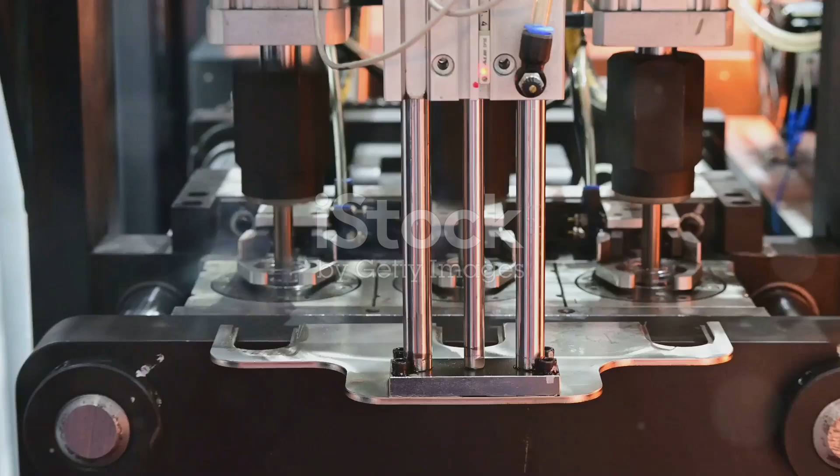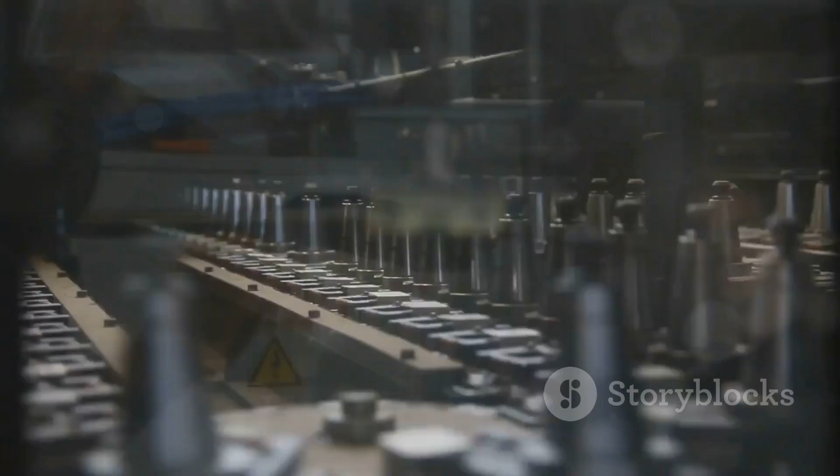Plastic die molds are the unsung heroes of manufacturing. These precision tools create a wide variety of plastic products we use daily. From medical devices to toys, they are the backbone of modern manufacturing.

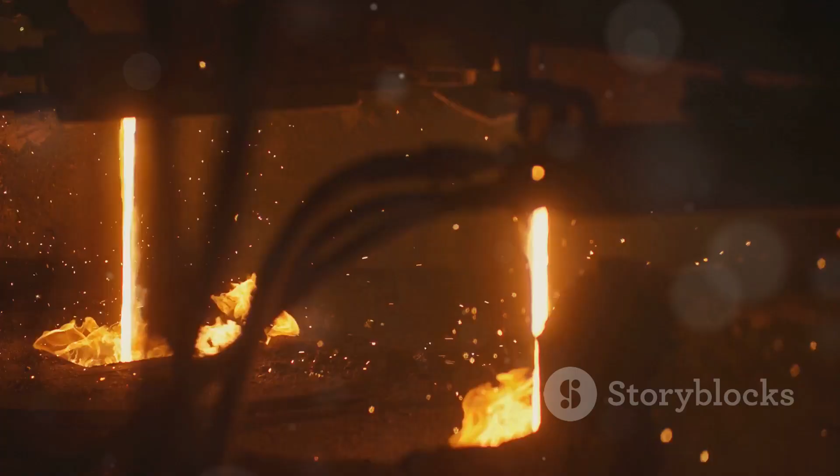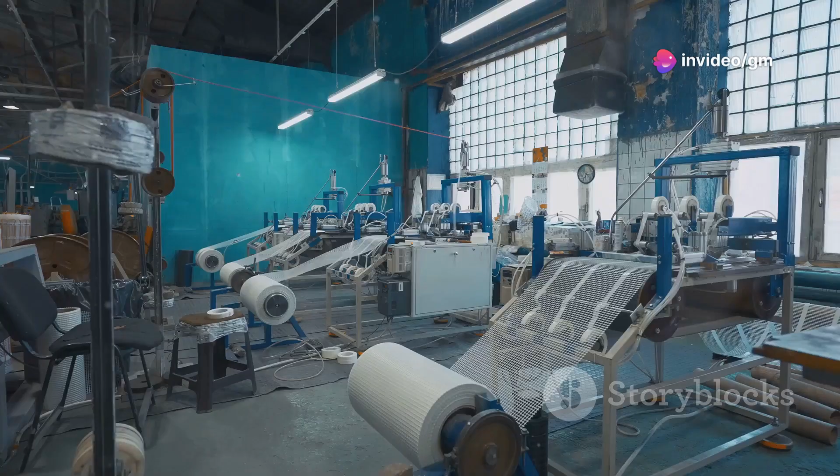Imagine a mold as a cookie cutter, but instead of dough, we use molten plastic. The process involves injecting molten plastic into a mold cavity, cooling, and ejecting the solidified part. This seemingly simple process requires a complex interplay of design, engineering, and precision machining. Without plastic die molds, our world would be very different.

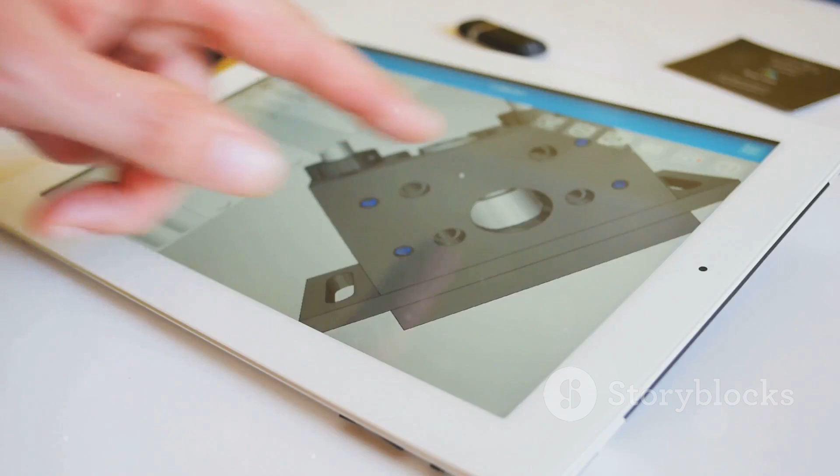The journey of creating a plastic part begins with a vision. This vision is translated into a detailed design using CAD software. Think of CAD software as a digital sculptor's toolkit, creating intricate three-dimensional models.

This digital model serves as the blueprint for the entire mold-making process. Every detail is meticulously defined, ensuring the final plastic part is flawless. Skilled engineers work tirelessly to perfect this digital blueprint.

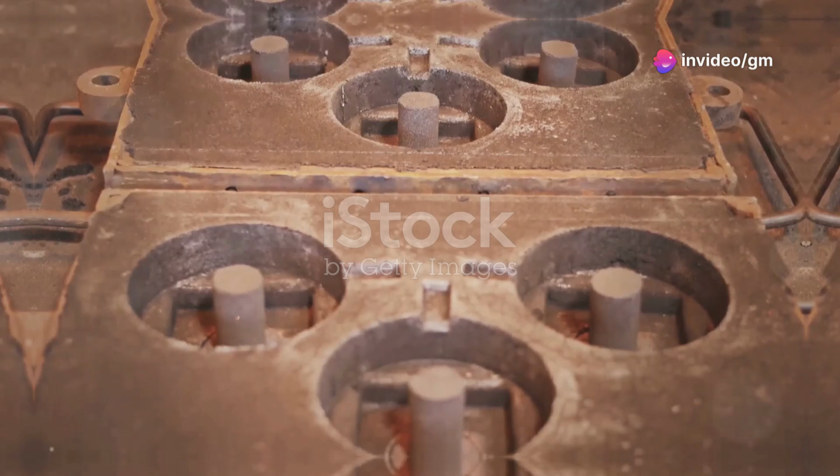The mold base is the foundation upon which the entire mold is built. It serves as the backbone, providing the necessary support and alignment for the mold components. Without a solid and well-chosen mold base, the integrity and precision of the final product can be compromised.

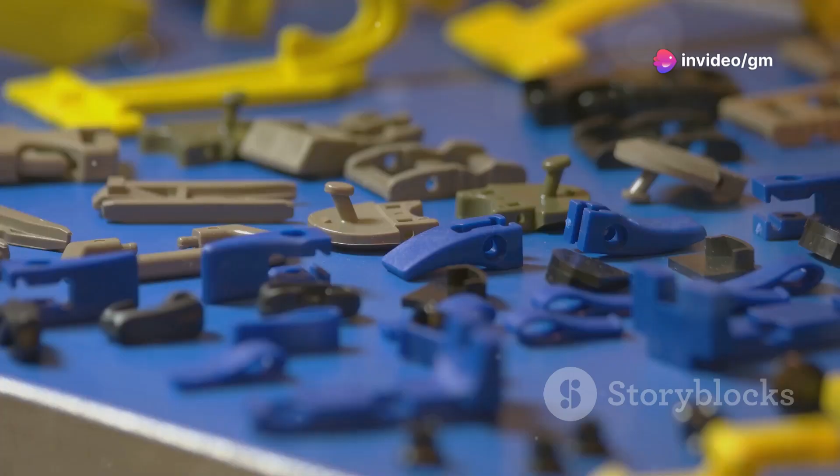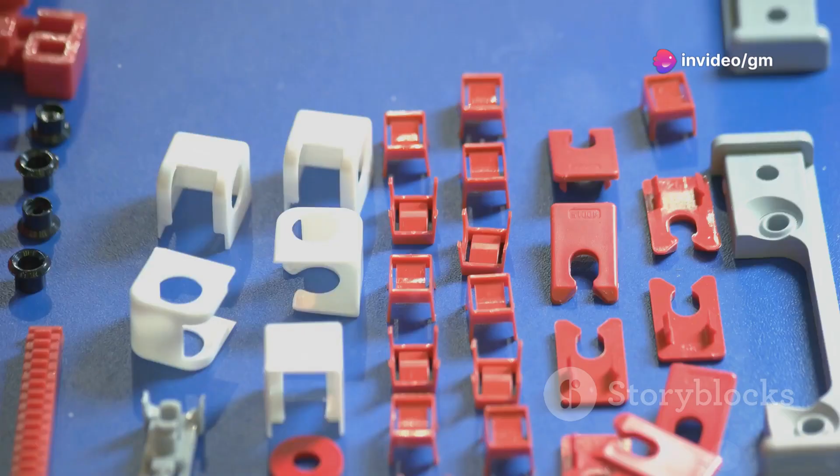The choice of material for the mold base depends on several critical factors. These include the type of plastic being molded, the complexity of the part design, and the expected production volume. For instance, if the plastic material is abrasive or the part design is intricate, a more durable mold base material might be required.

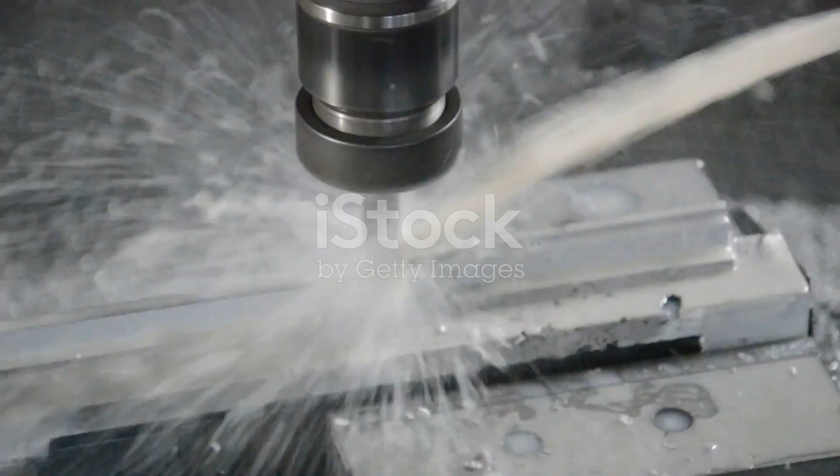Steel is a common choice for mold bases due to its exceptional strength and durability. It can withstand high pressures and temperatures, making it ideal for long production runs and complex molds. On the other hand, aluminum is favored for its lightweight properties and excellent thermal conductivity. This makes it suitable for prototypes and short production runs where quick heat dissipation is crucial.

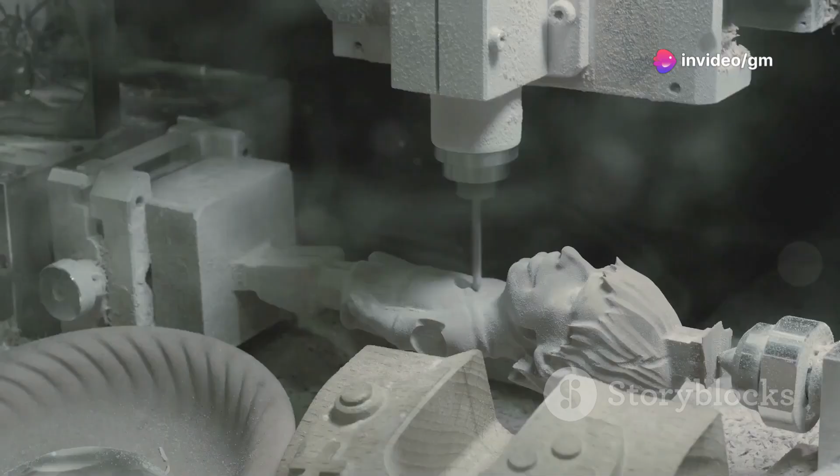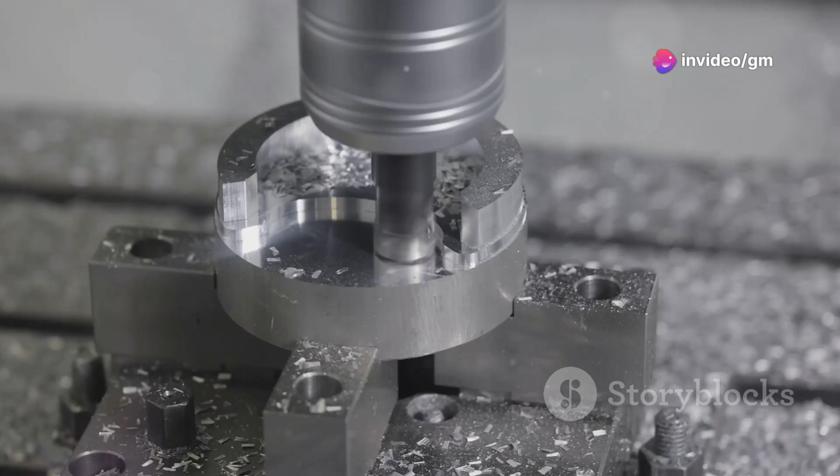The mold base is precisely machined to the exact dimensions specified in the digital design. This precision is crucial to ensure that all components fit together perfectly and function as intended. Creating a mold base involves using specialized cutting tools to carve out spaces for the cavity, core, and cooling channels. These features are essential for the molding process, as they help shape the final product and manage the heat generated during molding.

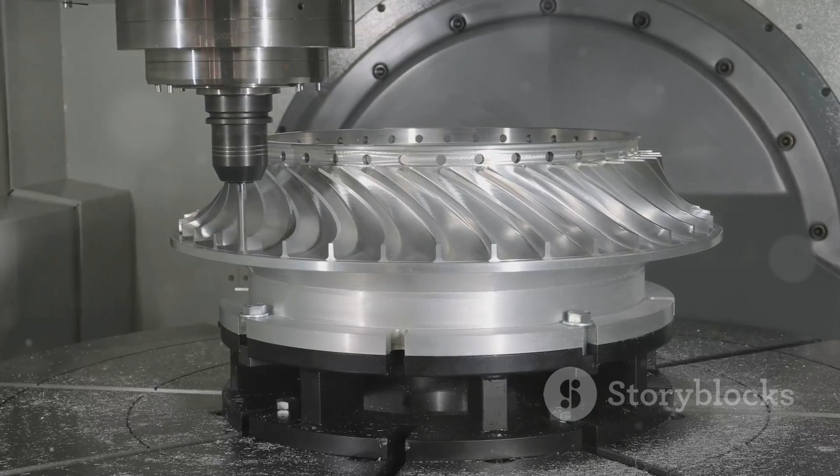Skilled machinists and advanced CNC machines play a vital role in this process. Their expertise and precision ensure that the mold base is crafted to perfection, providing a reliable foundation for the plastic die mold. This meticulous attention to detail is what ultimately leads to high-quality, consistent production outcomes.

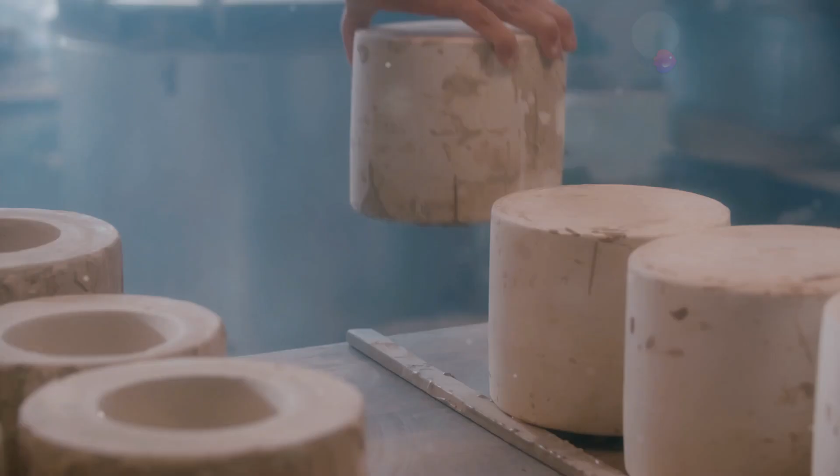With the mold base ready, the next step is to create the cavity and core. The cavity gives the plastic part its external shape, while the core forms the internal surfaces. Machining the cavity and core demands specialized tools and techniques.

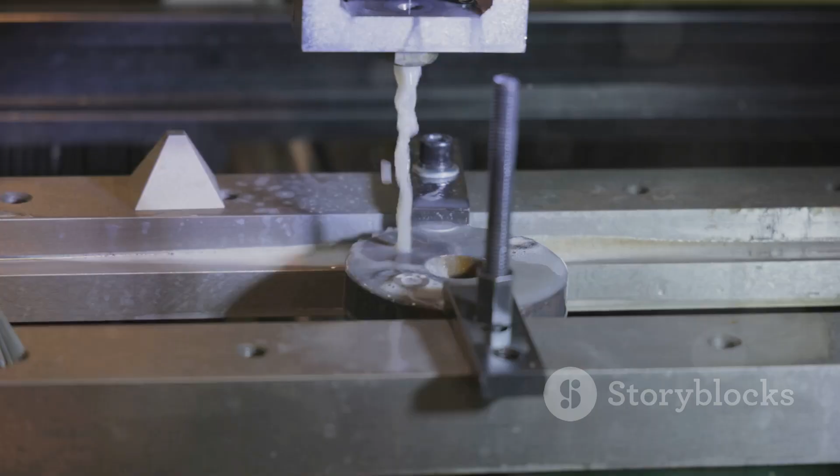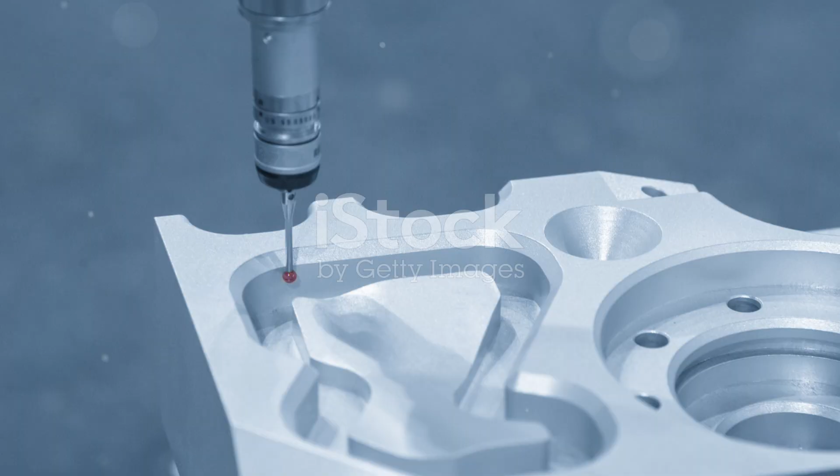For intricate designs, electrical discharge machining, EDM, is often used. EDM uses electrical sparks to erode material with extreme accuracy. This precision ensures the final plastic part has the desired shape, size, and surface finish.

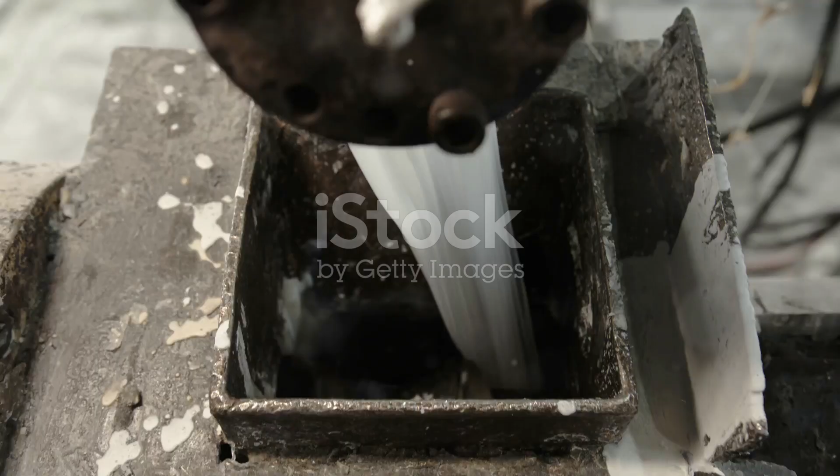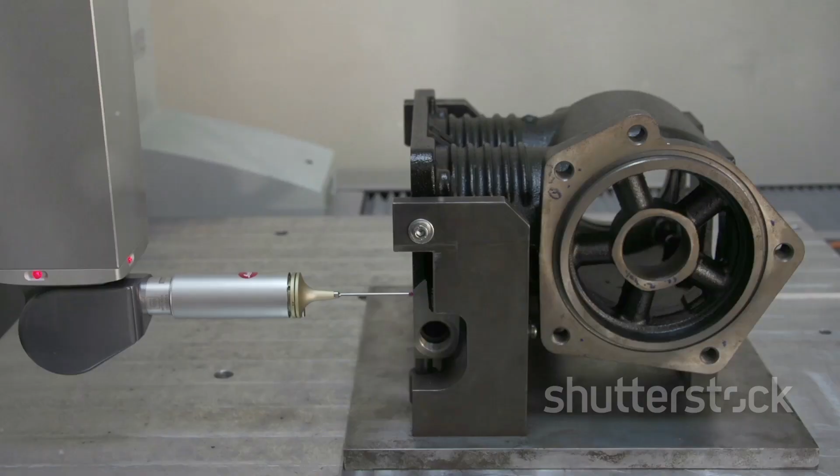Cooling plays a vital role in plastic injection molding. As molten plastic cools, it tends to shrink, which can lead to warpage or defects. Cooling channels circulate a fluid to regulate the mold's temperature. These channels ensure even cooling, preventing defects like sink marks or warping. Engineers carefully calculate the optimal layout and size of cooling channels. This ensures high-quality, dimensionally stable parts.

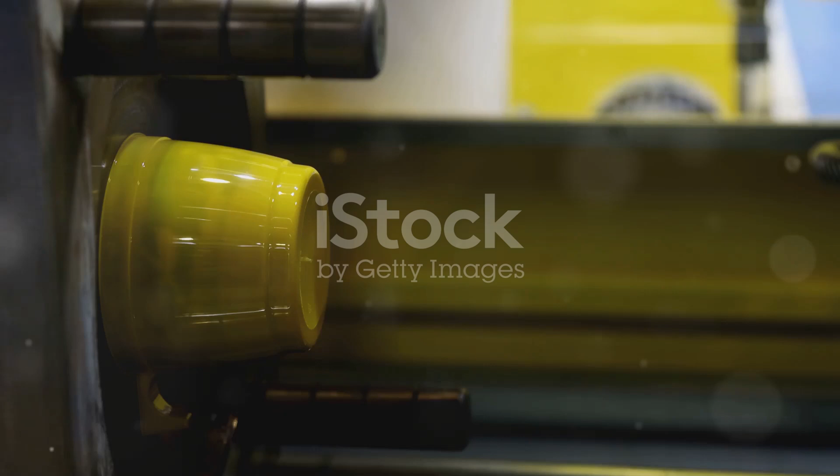Once the plastic has cooled, it's time to release the part from the mold. This is a crucial phase in the mold design process, as the integrity of the final product depends on how well this step is executed. The cooling process solidifies the plastic, making it ready for the next stage.

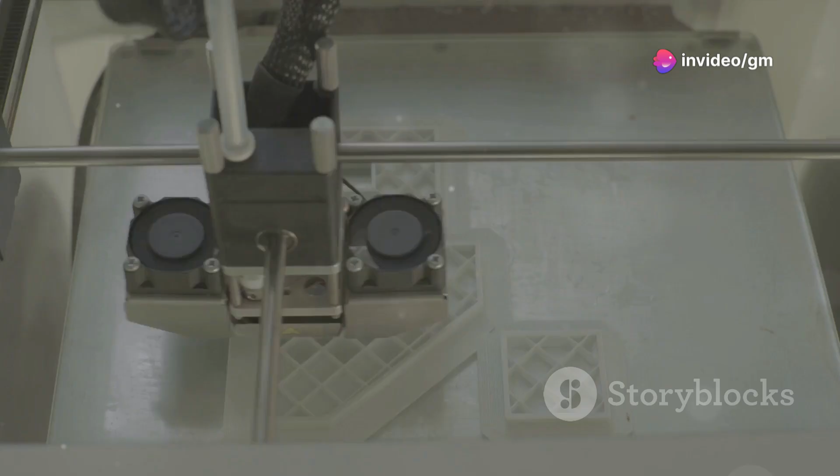The ejection system ensures the part is removed smoothly and without damage. This system is meticulously designed to handle the part delicately, preventing any potential defects that could arise from improper ejection. The efficiency of the ejection system is paramount to maintaining the quality of the molded part.

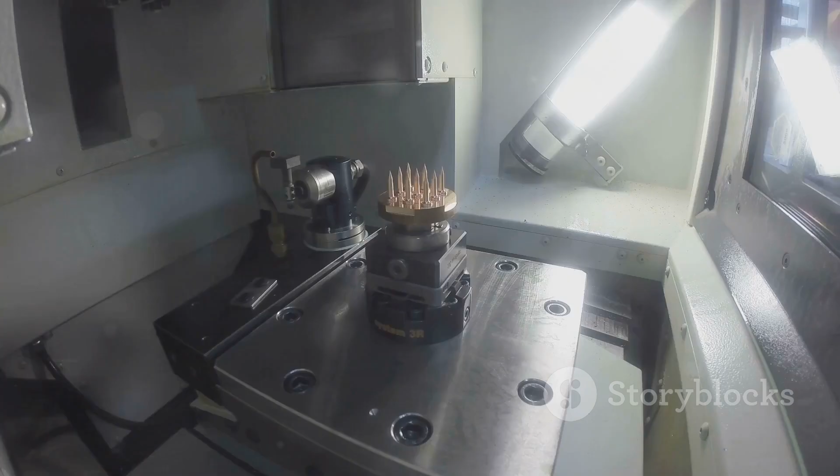Ejector pins, small cylindrical pins, gently push the part out of the mold. These pins are strategically placed to apply uniform pressure, ensuring the part is released without any warping or deformation. The precision of the ejector pins' movement is a testament to the detailed engineering involved in mold design.

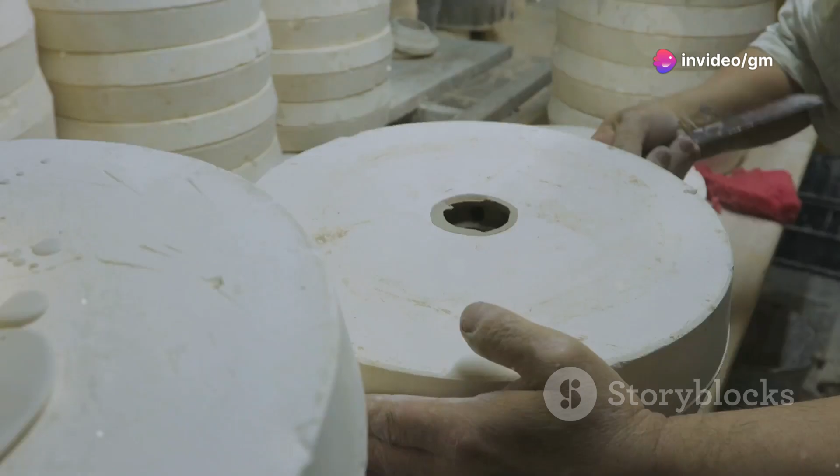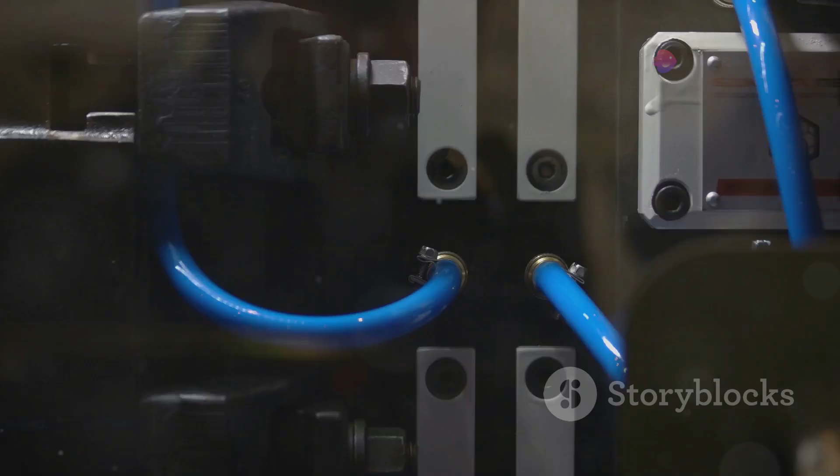For complex parts, stripper plates may be used to strip the part away from the mold. Stripper plates are particularly useful for parts with intricate designs or undercuts that make them difficult to eject using pins alone. They provide an additional layer of support, ensuring the part is released cleanly and efficiently. The design and placement of ejector pins and stripper plates are critical.

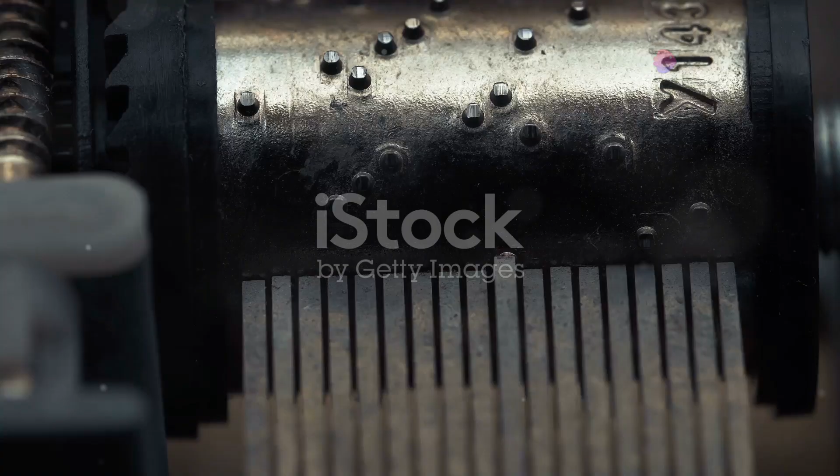Engineers must carefully consider the geometry of the part and the mold to determine the optimal locations for these components. Proper placement ensures that the ejection process is smooth and that the part maintains its intended shape and dimensions. They ensure the part is ejected evenly without applying excessive force.

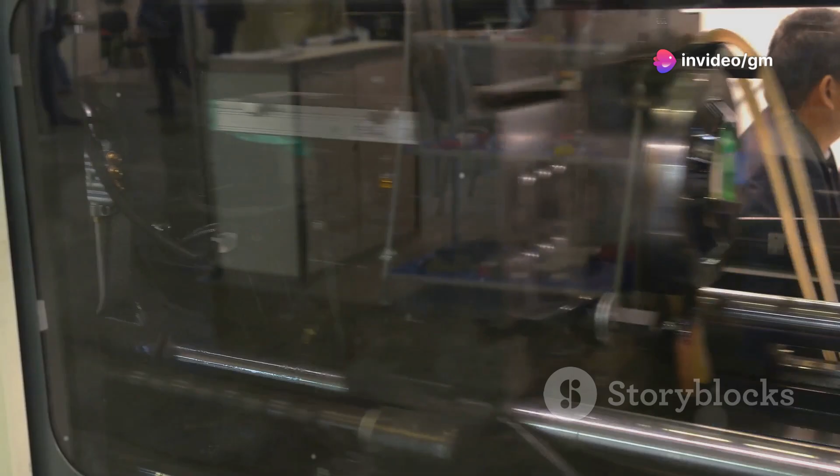Even distribution of force is essential to prevent stress concentrations that could lead to cracks or other defects. The goal is to achieve a seamless release that preserves the quality and functionality of the part. This careful planning ensures the efficient and damage-free release of each molded part.

Every aspect of the ejection system, from the type of pins used to the timing of their activation, is meticulously planned and tested. This attention to detail is what makes the difference between a high-quality product and one that fails to meet standards. The success of the mold design process hinges on these vital steps, ensuring that each part is produced to perfection.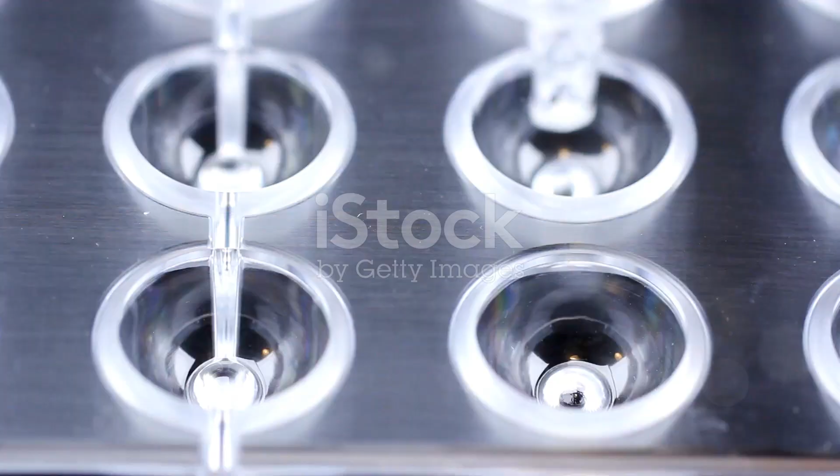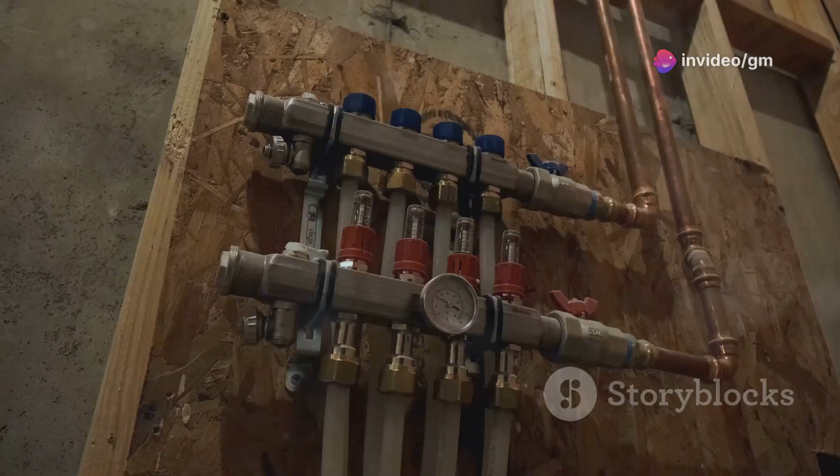With all components crafted, it's time to assemble the mold. The assembly process begins by fitting the cavity and core inserts into the mold base. These inserts are precisely aligned and secured, ensuring a sealed cavity for the molten plastic. Cooling channels are connected to the external plumbing system. The ejection system is integrated with ejector pins or stripper plates aligned and connected. Skilled technicians ensure every component is perfectly aligned and securely fastened.

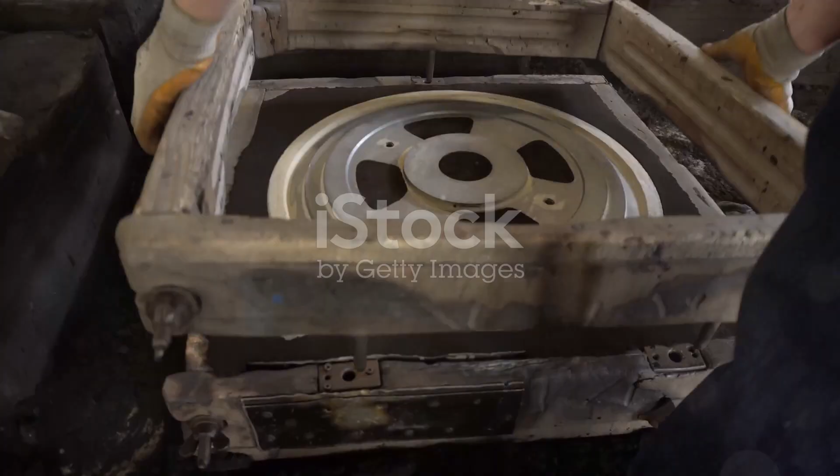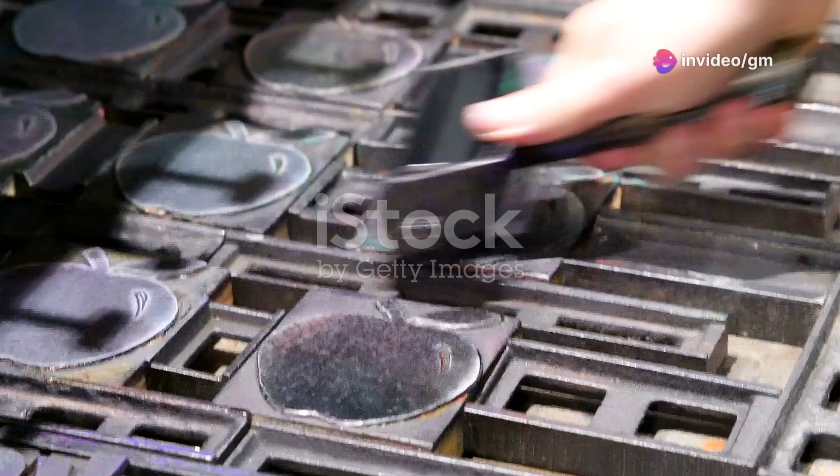The mold's surface finish plays a crucial role in the final part's appearance and functionality. A well-polished mold ensures that the plastic part produced is smooth, free of defects, and meets the desired specifications. The quality of the mold surface directly impacts the efficiency of the production process and the overall quality of the final product. A rough surface can result in blemishes or difficulty in ejecting the part.

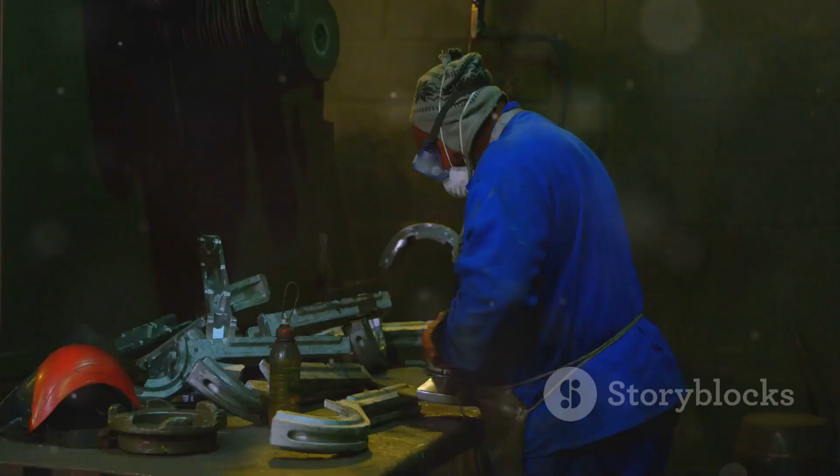These imperfections can lead to increased production time and higher rejection rates, ultimately affecting the cost and efficiency of manufacturing. Ensuring a smooth mold surface is essential to avoid these issues and to produce high-quality parts consistently. The mold undergoes a meticulous polishing process to achieve the desired surface quality.

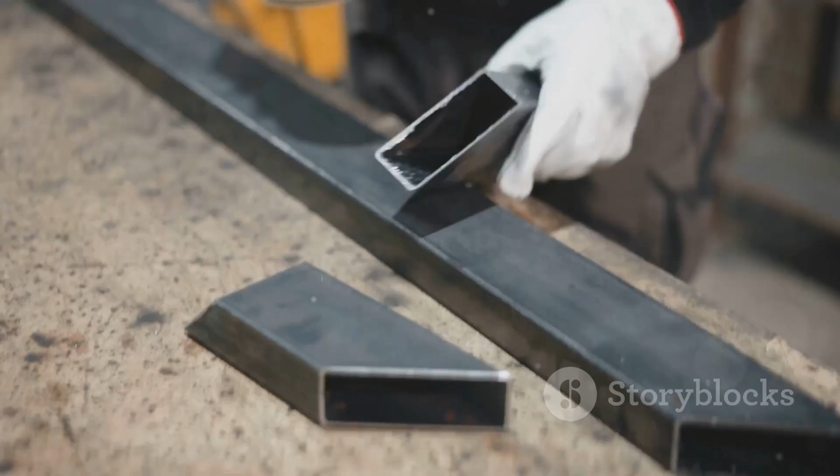This process involves several stages, each using different tools and techniques to gradually refine the surface. Skilled technicians carefully polish the mold, paying close attention to every detail to ensure a flawless finish. Polishing starts with coarser grits, progressing to finer grits for a mirror-like finish. This step-by-step approach ensures that any initial roughness is smoothed out and the surface becomes progressively finer.

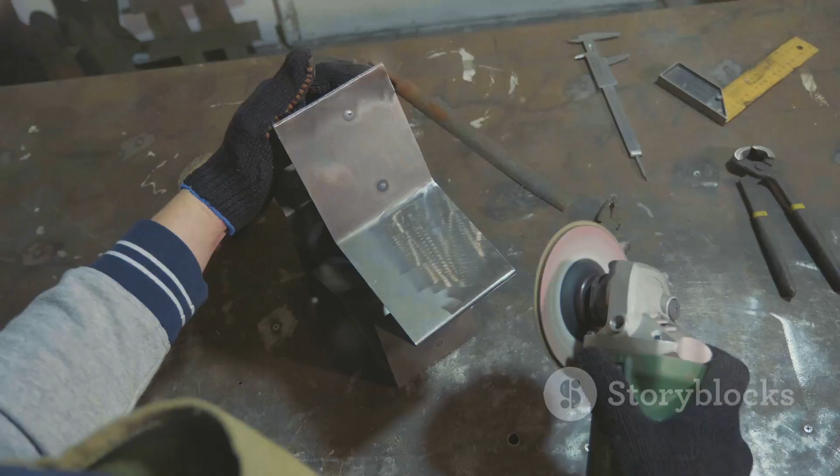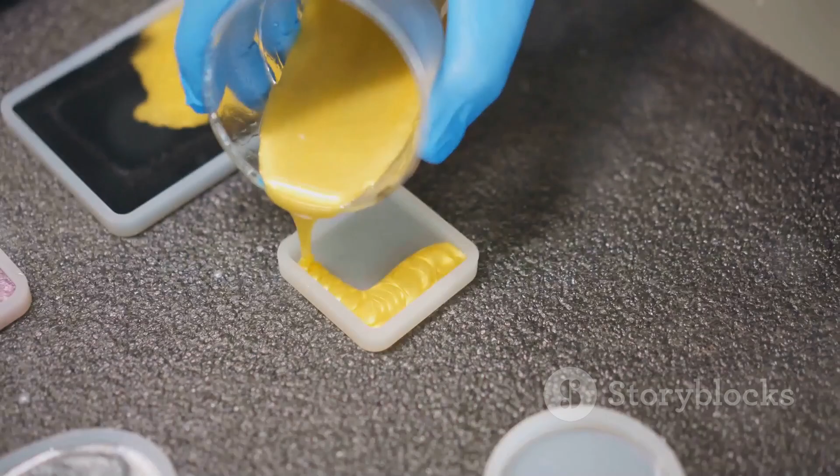The final stages of polishing use extremely fine abrasives to achieve a high-gloss, mirror-like finish that is essential for certain applications. Textures can be added to create specific patterns or finishes on the plastic part. These textures can range from simple matte finishes to complex patterns that enhance the aesthetic appeal or functionality of the part. The choice of texture depends on the intended use of the part and the desired visual effect.

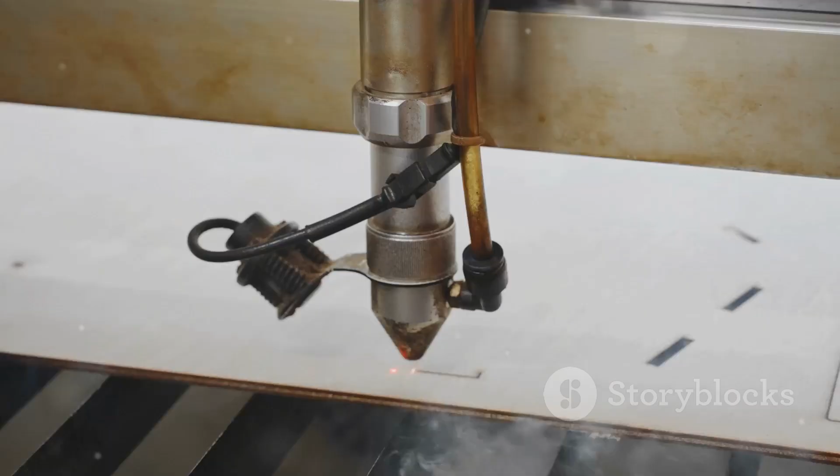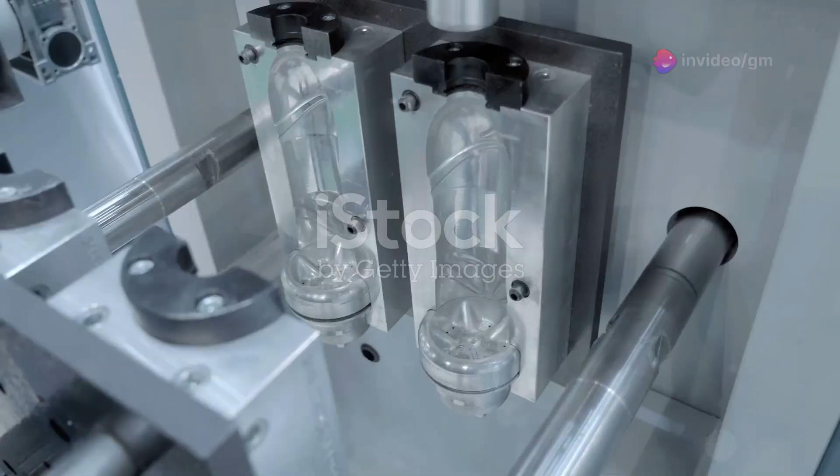Methods like laser etching or chemical etching are used for texturing. Laser etching allows for precise and intricate designs, while chemical etching can create uniform textures over larger areas. Both methods offer unique advantages and can be selected based on the specific requirements of the project. The mold's finishing touches are crucial for the final plastic part's aesthetic and functional qualities.

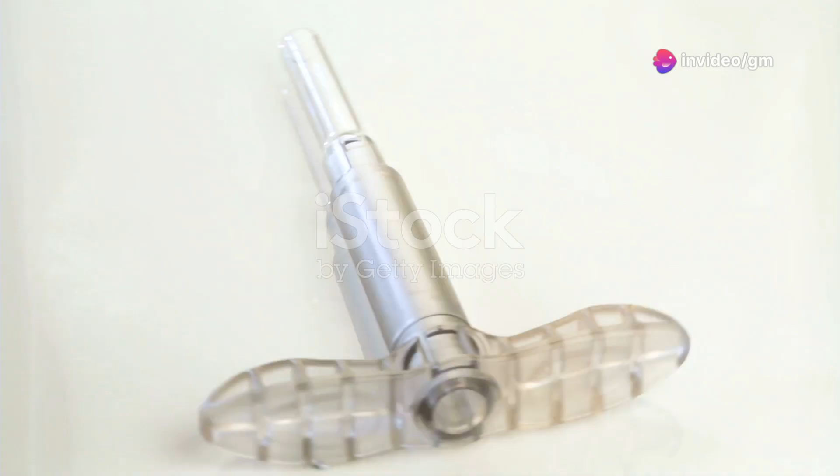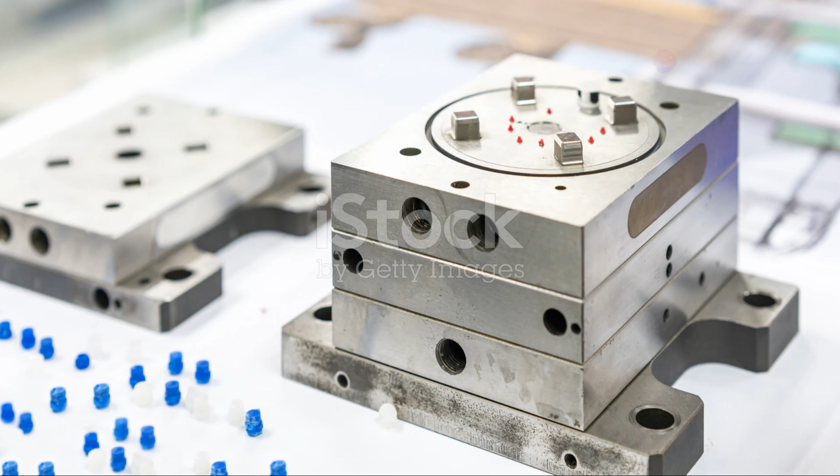A thorough inspection ensures that the mold meets all specifications and that the surface finish is perfect. The comparison between the polished mold and the finished plastic part highlights the importance of this process in achieving high-quality results. The attention to detail in mold finishing ultimately leads to better performance, durability, and appearance of the final product.

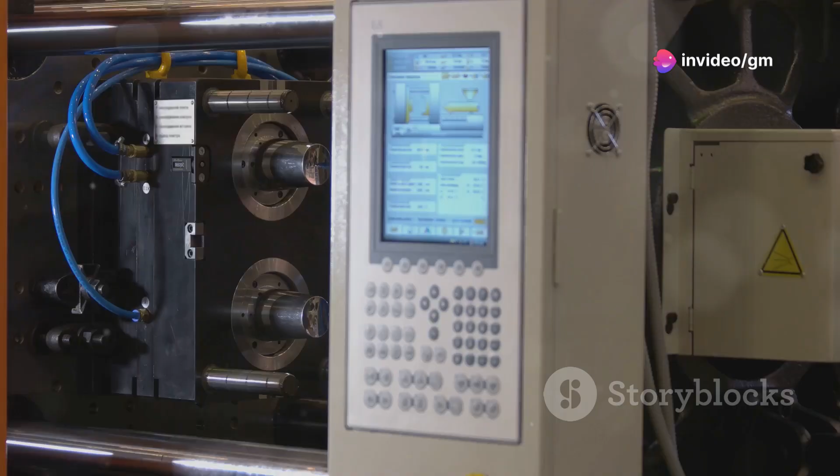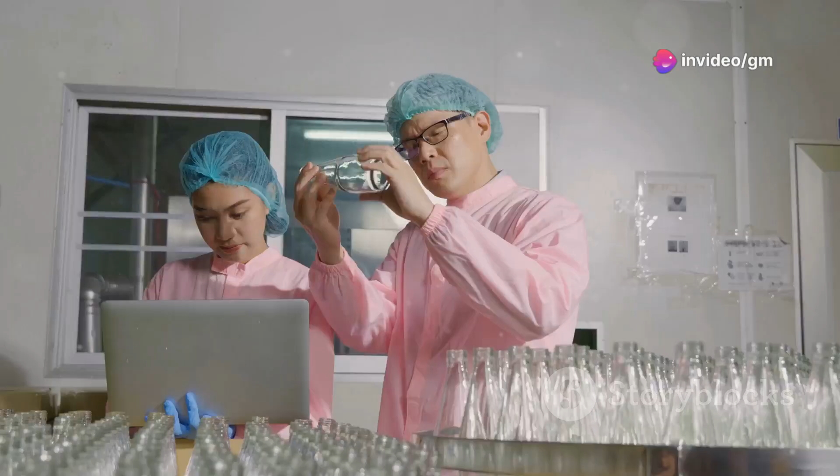Before mass production, the mold undergoes rigorous testing. This step identifies and rectifies any potential issues. The testing process involves running the mold on an injection molding machine. Engineers inspect the molded parts for defects and monitor the cooling and ejection systems. If issues are detected, the mold is modified and retested. This meticulous approach ensures the final mold is optimized for efficient production.

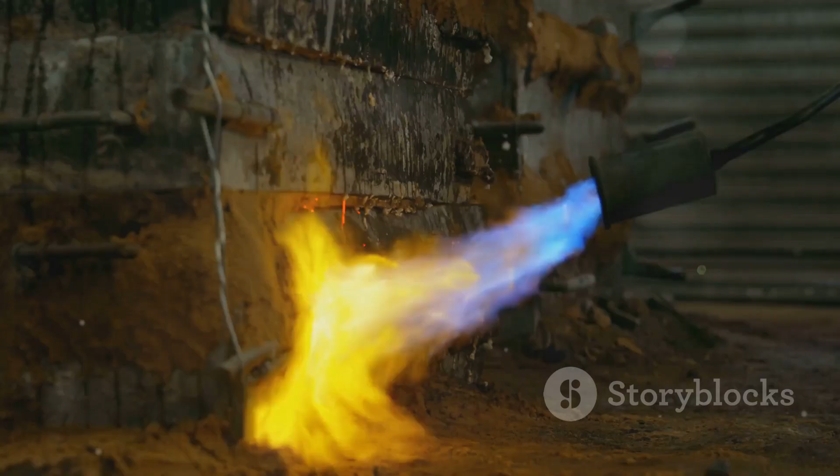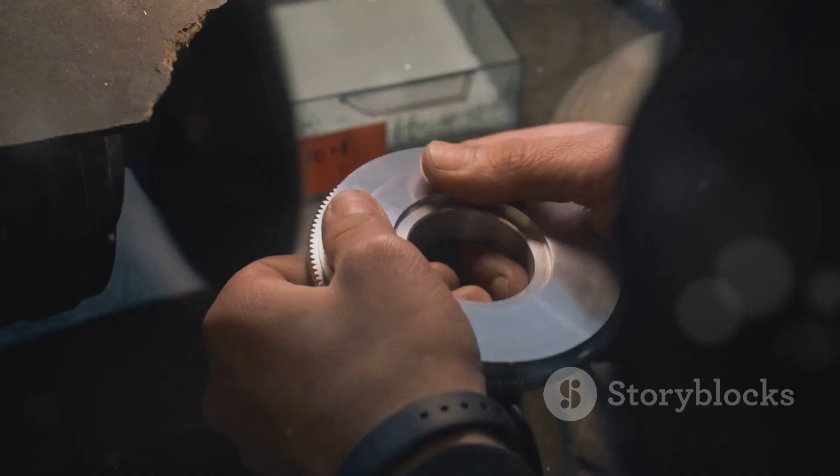Once the mold passes all tests, it undergoes a final hardening and finishing process. Hardening involves heat treating the mold to increase its hardness and wear resistance. The mold might undergo additional surface treatments to enhance durability. Wear-resistant coatings reduce friction and prevent material buildup. The mold undergoes a thorough cleaning and inspection process. The mold is now ready for mass production.

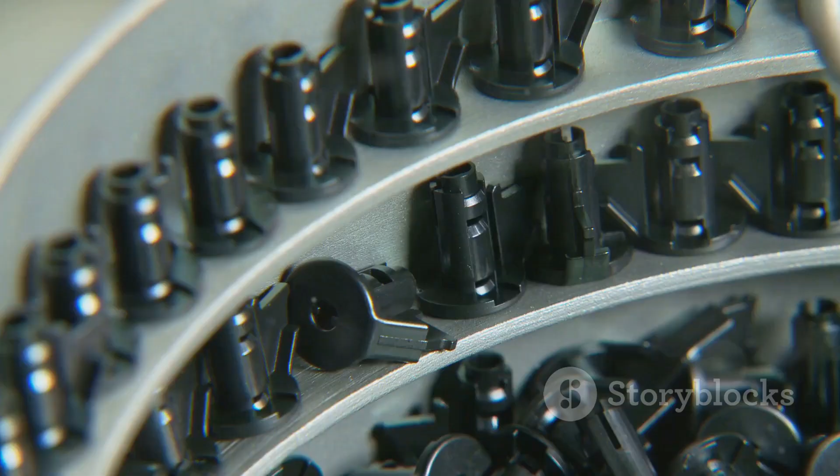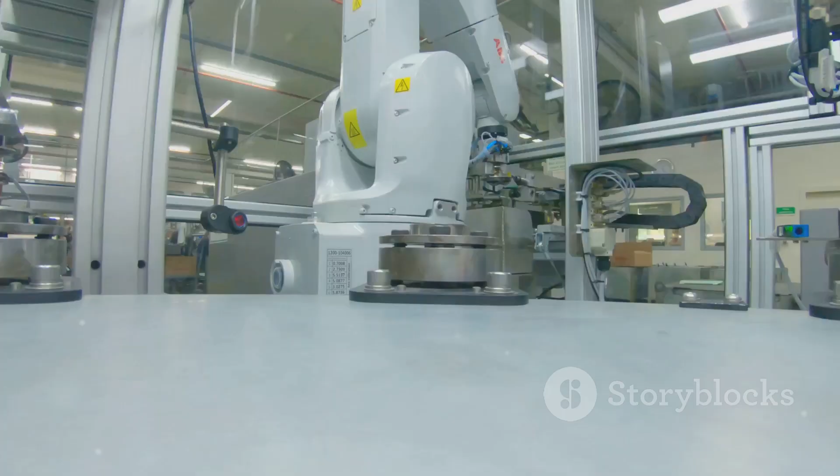Plastic die molds are the unsung heroes of our modern world. These tools shape countless aspects of our lives, from cars to medical devices. The journey of crafting a plastic die mold is a testament to human ingenuity. Every step demands precision, expertise, and a deep understanding of materials. As demand for plastic products increases, plastic die molds will continue to evolve. Behind every plastic product lies a complex world of engineering and manufacturing, orchestrated by the plastic die mold.